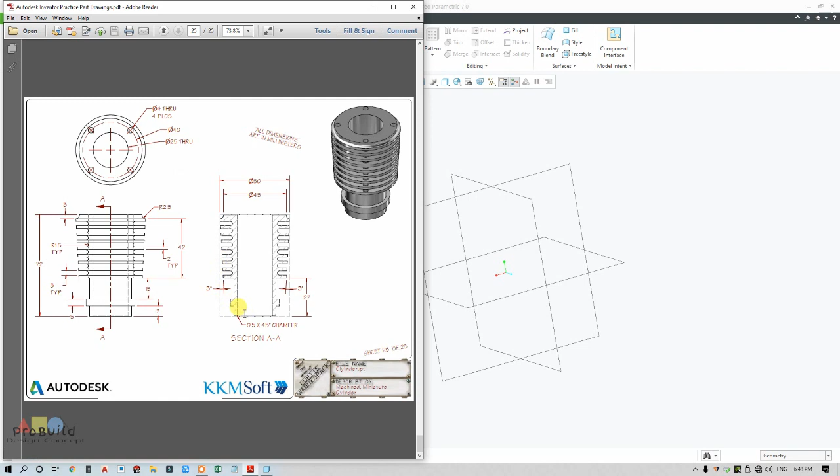So let's go into the model. I'm going to draw a circle, so let's go to the front or right plane. I'm going for revolve operation with a 2D sketch, and once opening revolve, don't forget to put a 3D center line, which is very important, else it will not work.

First I'm going to mark only one single dimension, so that it assumes the remaining dimensions I'm going to construct will be smaller. My first circle dimension is going to be 25 through. This is actually given here as 40 - sorry, this is not 40, actually 25. My first dimension is 25, so here I'm going to put 25.

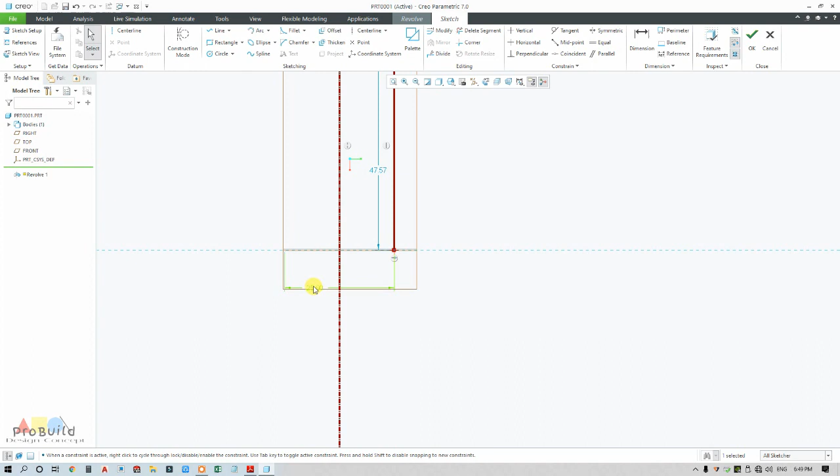Switch off the plane, and my height is going to be 72.

Here you can find there are many steps, but I'm not going to construct it that way. I'm going to go with a different kind of operation which makes my 3D model much easier to construct. I want to draw this outer sketch alone, so my extreme circle diameter is 50, and somewhat it is decreased to 45.

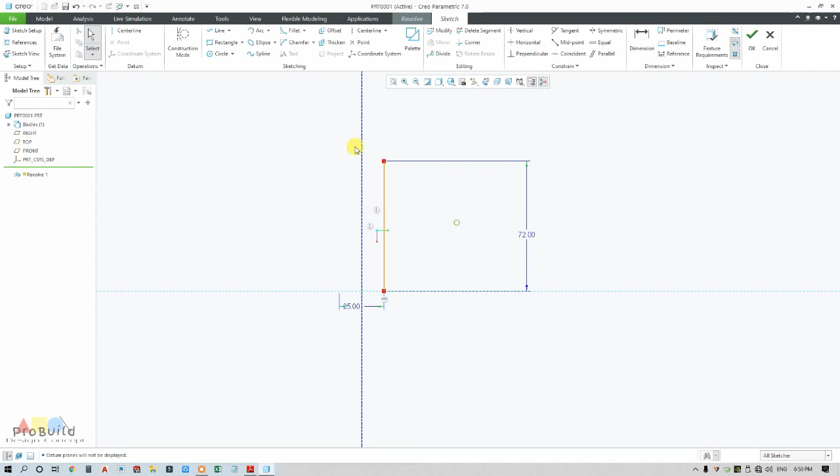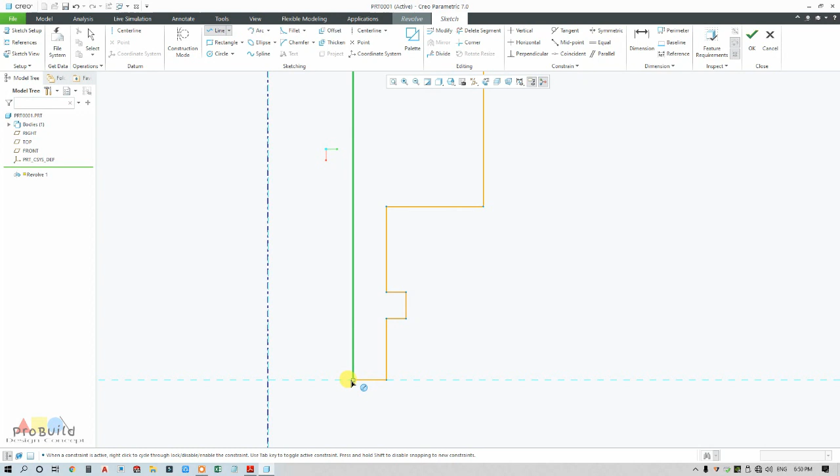Let me draw one line constructing from here, going from this point, and it is going this way. So I constructed the skeleton. Now all temporary dimensions have appeared. Now I'm going to put the required dimensions, then constrain it everywhere.

So these are all the dimensions which are needed, and also this one. This is 45 as stated, and this one from here to here is going to be 50, which means 25, and overall length is actually 72. You can find that from this base it is 7, and this one is 5, and this one is 15 and 42.

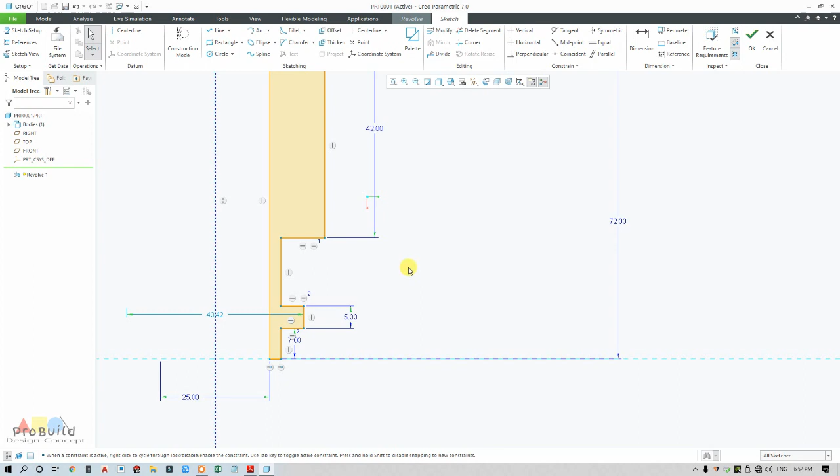Actually this one is 5, this one is 7, and this one is 42. So this one I did not constrain, because I constrained this as overall height, clearance is actually 72, so it will be that as this 25 radius and this is 25 diameter.

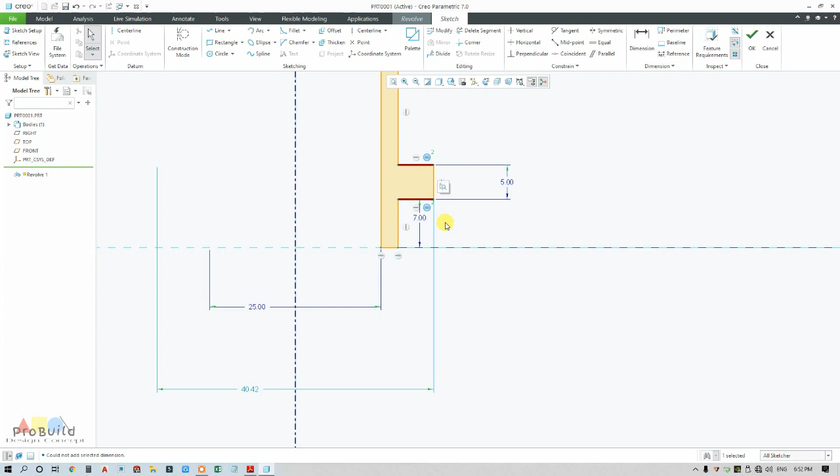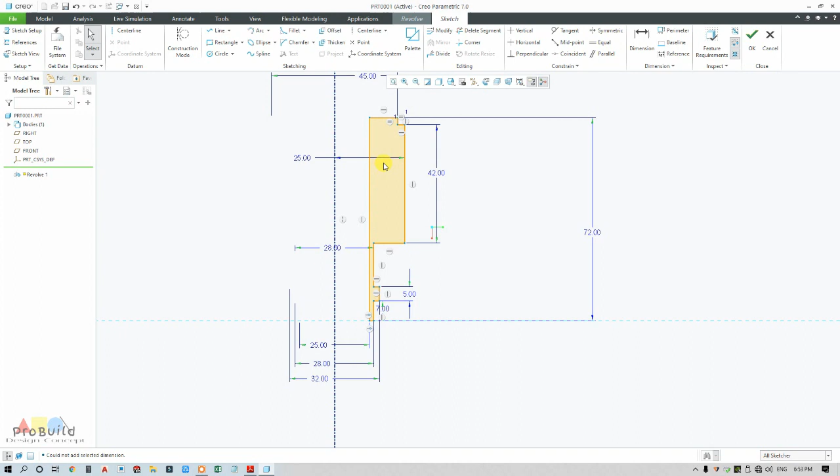Now this value isn't given, and this thickness is not given, so I'm going to convert this to radius. Let me make it not equal so it comes here. I'm going to presume here as 38, 28. And even this is not equal to - this is also 28, and overall I'm going to convert into 32, and this one is 50. No problem, I'm done with the object.

So this is what it is given, so let me convert this to 30 so it looks thicker, and this to 34, then click OK to form the basic 3D model. So my 3D model is obtained.

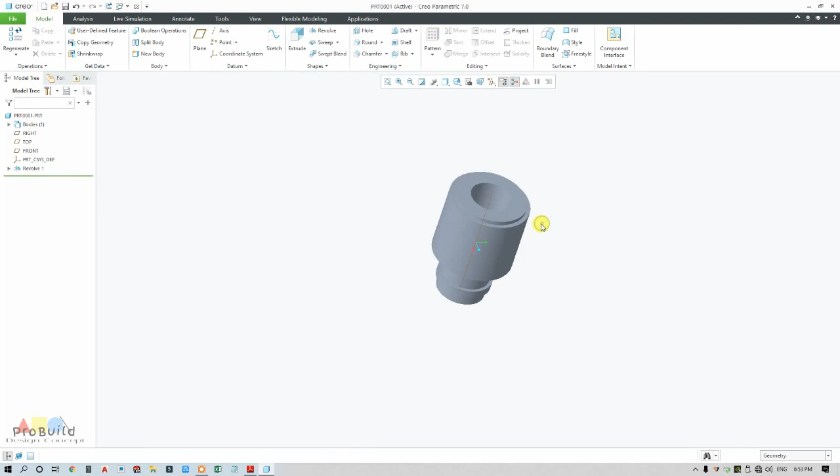Now what I'm going to do is one small operation here - they have given a 0.5 into 45 degree chamfer. Let me go to this chamfer, click this edge, and change here as 0.5. So this is done. Now I need to create a profile.

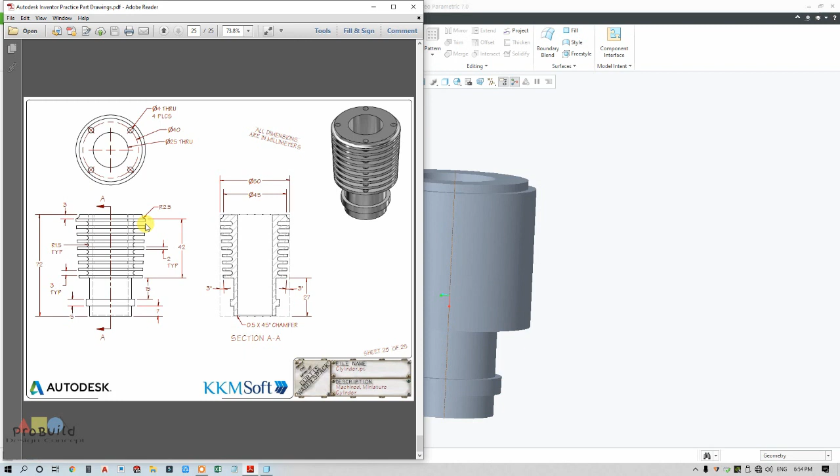So here they have given fins - actually 1, 2, 3, 4, 5, 6, 7, 8 and 9 fins are given. So I'm going to calculate this 42 divided by 9, which means this fin thickness is actually 2. I'm going to calculate this removed material thickness alone, so that I can easily pattern it.

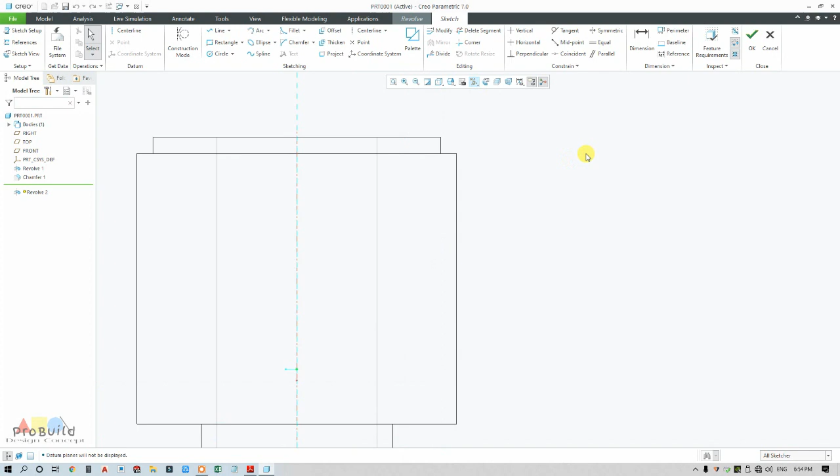So choose any one of the planes. I'm going to choose the top plane and go for revolve once again, and change this to hidden line. Switch off the plane. Now I'm going to draw - you can find here that the fin starts from this point. Actually I'm going to start this sketch alone.

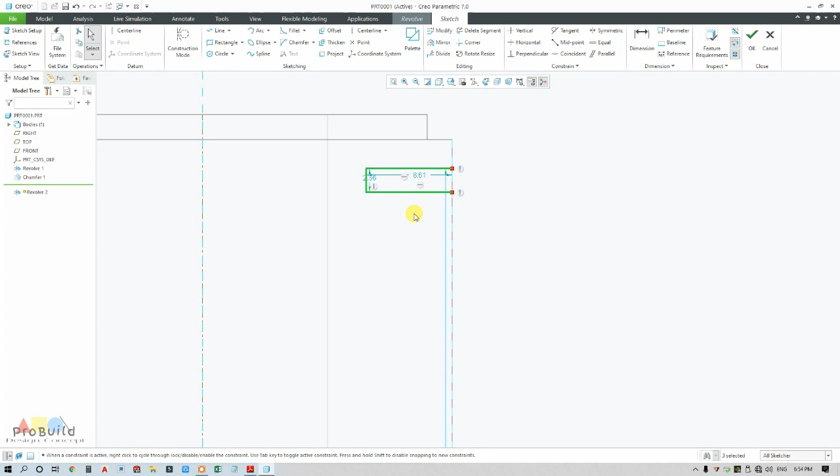So what I'm going to do is start here with my sketch, and put a geometry center line here - don't forget. This one I'm going to set as 30, and this one as - I need to calculate this actually.

The fin's thickness is 2, so overall this number of items is going to be 9, so 9 into 2 is 18. Let me calculate. Overall height is 42 minus 18, so 24. So 24 is going to be the cumulative 9 items thickness. So it's going to be divided by 9, which gives me 2.667. So I'm going to take it as 3.01.

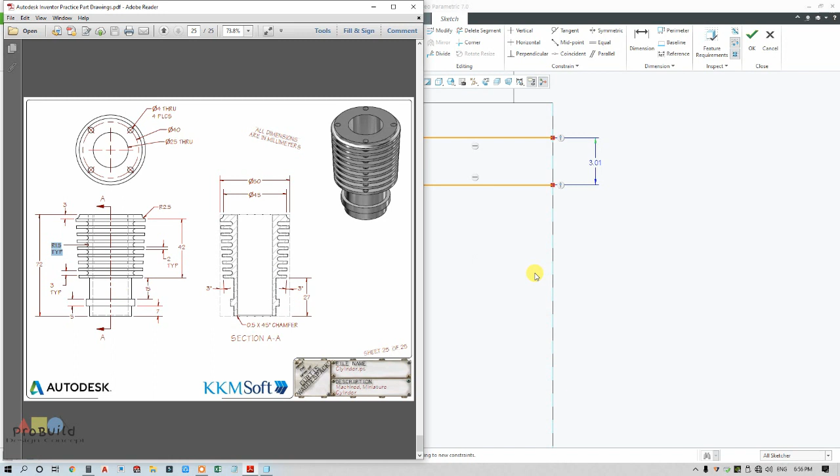I will say why I'm taking this 0.01. So there's one difference we can find. This one is actually 3.01. Okay, because the data given here is R 1.5. So here 1.5 plus here 1.5 is going to be 3 exactly, but the fillet needs some clearance to have one small line, so I'm giving 0.01 as basic tolerance.

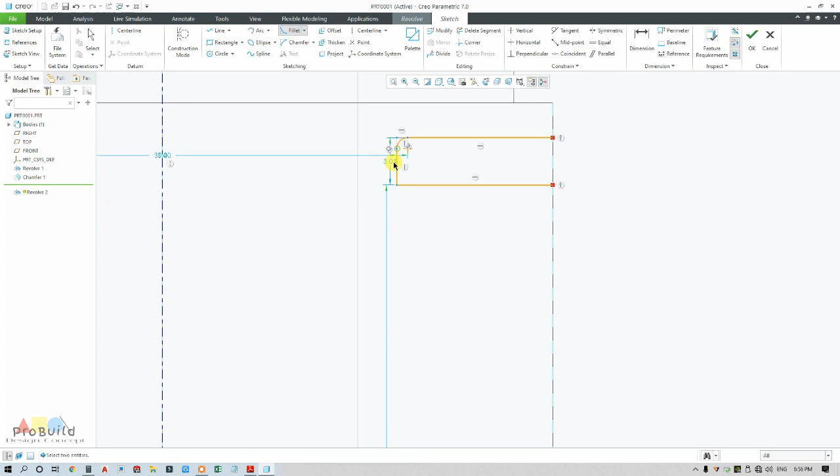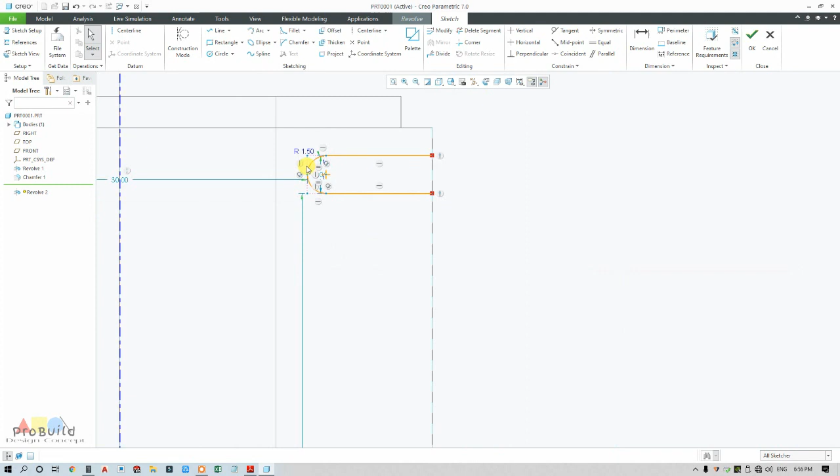So just go for fillet here itself, else it would be very tedious when you make round for 9 into 2. So go for equal, click this and this so that it becomes equal. I'm going to make one dimension change so that it gets reflected to the other side. So if I make 1.5, it gets reflected. Now close this profile and click OK. Now go for remove material and click OK.

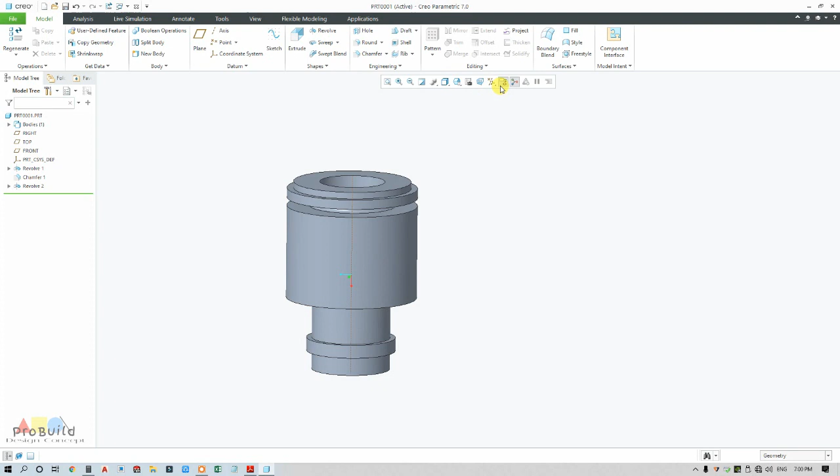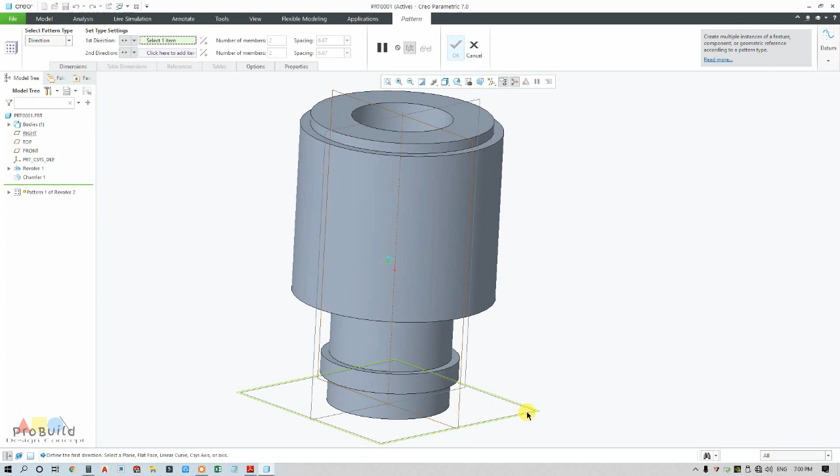So my material is removed now. Just click OK. Now switch on the plane, select this revolve operation and go for pattern. Now I'm going to teach you one pattern, so go for pattern, direction pattern, and you have to select any one direction. My pattern is going to come towards this vertical line from top to bottom, so I need to select this plane so that it comes bottom. See, it comes bottom here.

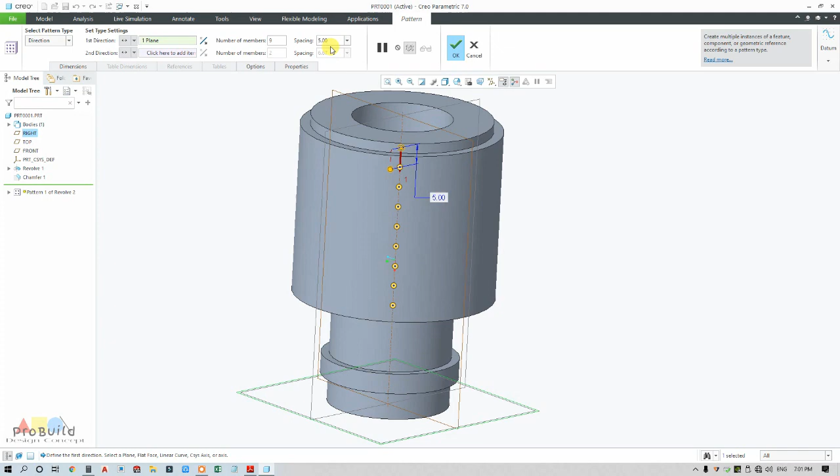My number of members is going to be 9, and internal spacing is going to be 5. You can assume that the thickness we drew, 3, plus 2, the fin thickness, is 5. So just click OK. Your fin will come here, and so it's all done.

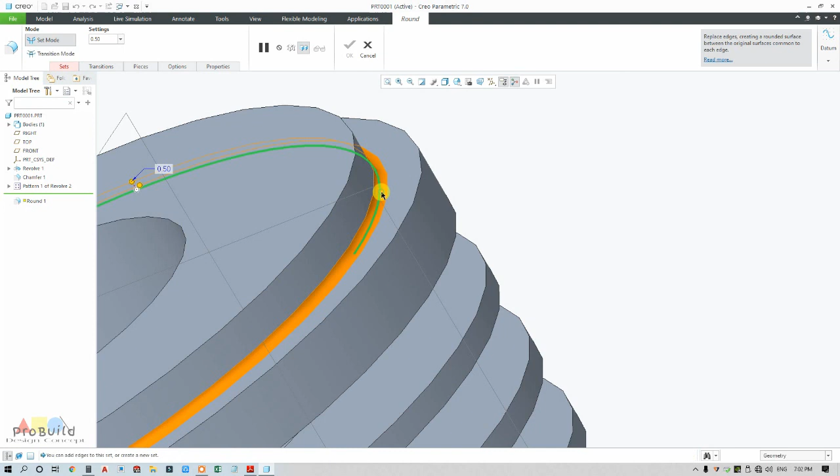Now I'm going to go with round. Here you can find that they have given R2.5. So just go to this edge, go to round, click this edge and change to 2.50, so it covers exactly. And now finally I need to go with this draft. I'm going to make a draft here of 3 degrees.

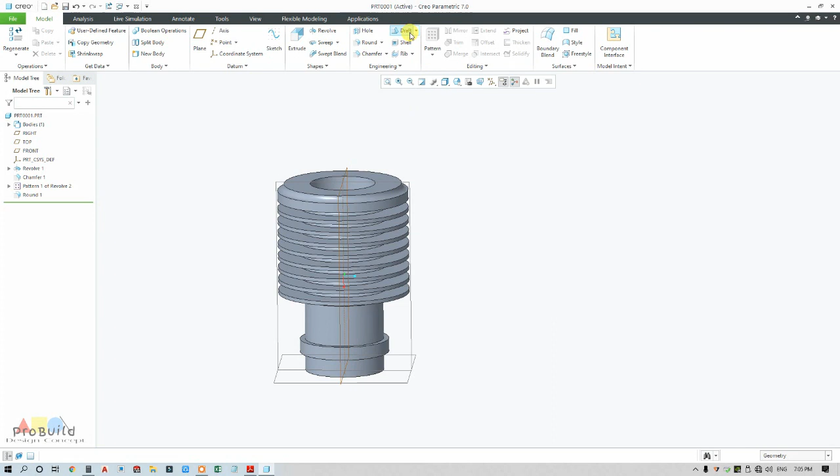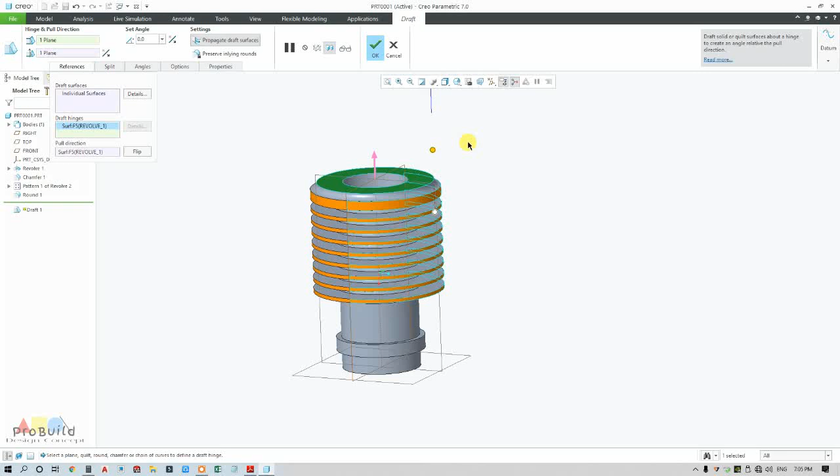So just go to draft, and here I'm going to keep this draft surface as the top surface, sorry, remove this. Draft surface is going to be this surface, and the draft hinge is going to be this top surface, so if you just click you can find this surface turns orange, right? And if you enter angle at 3 degrees it goes inside. So this is the draft angle, it decreases by 3 degrees, and my part is ready.

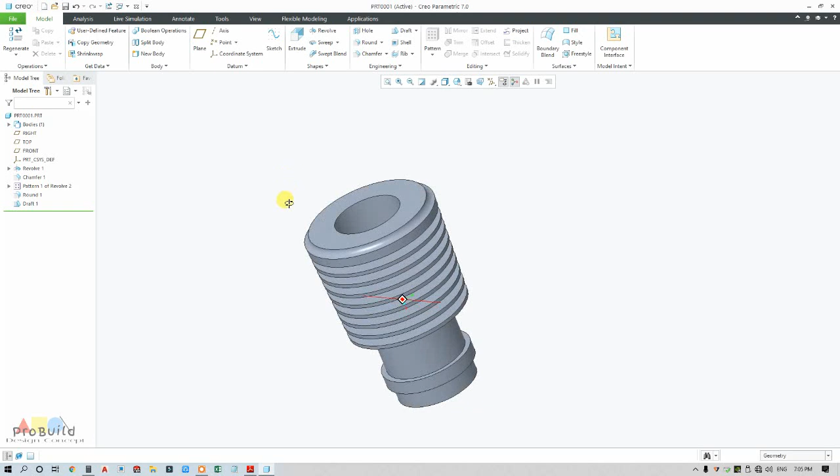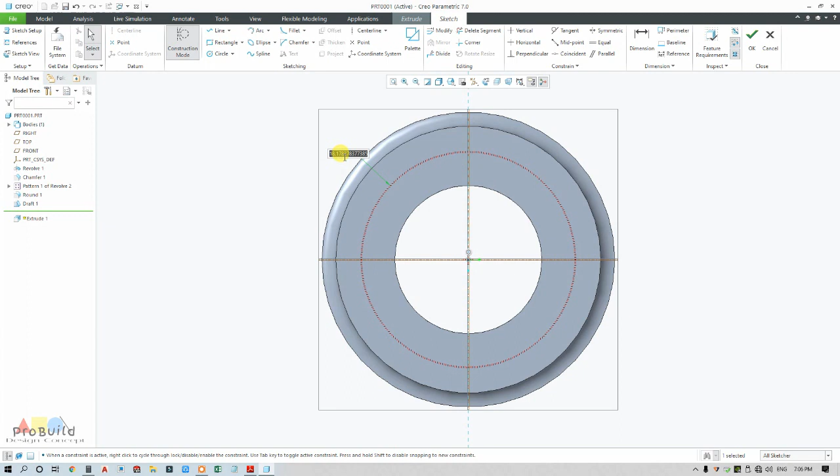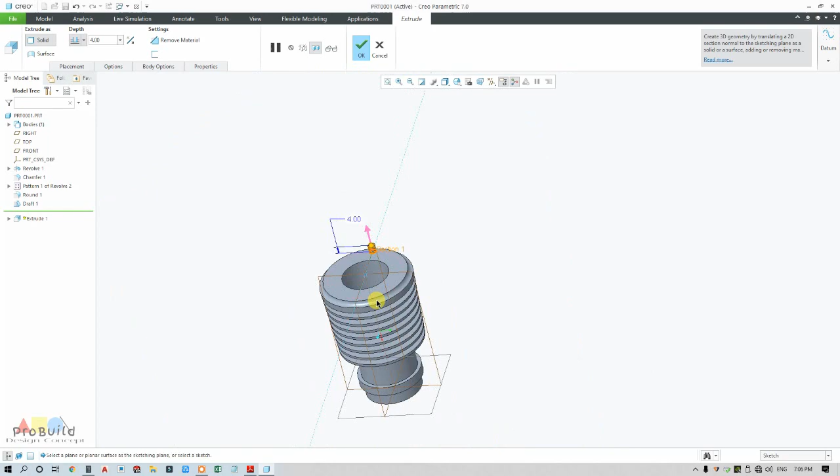So is there anything left? Yeah, this hole. Here they have given PCD as dia 40 and 4 places through. So just select the circle, go to extrude, go for construction line, draw a circle, change this to 20 since it is given as dia 40. Now switch off the construction mode, go for normal circle and change this to dia 4. Now click OK. It's going all the way down and it is removing the material also.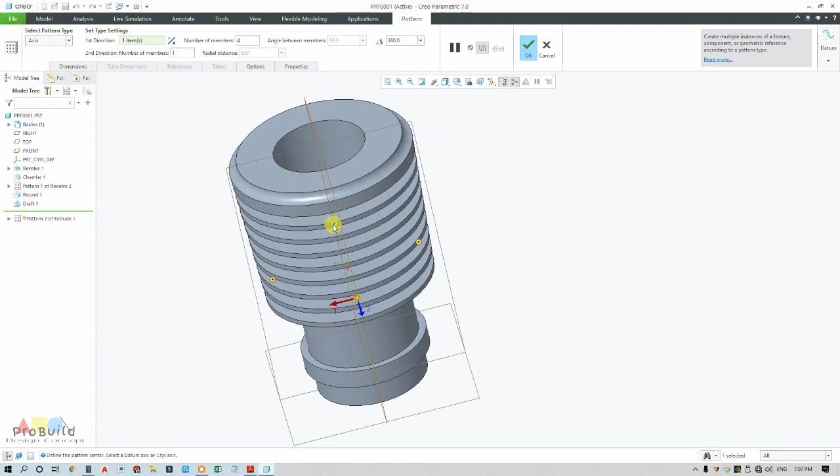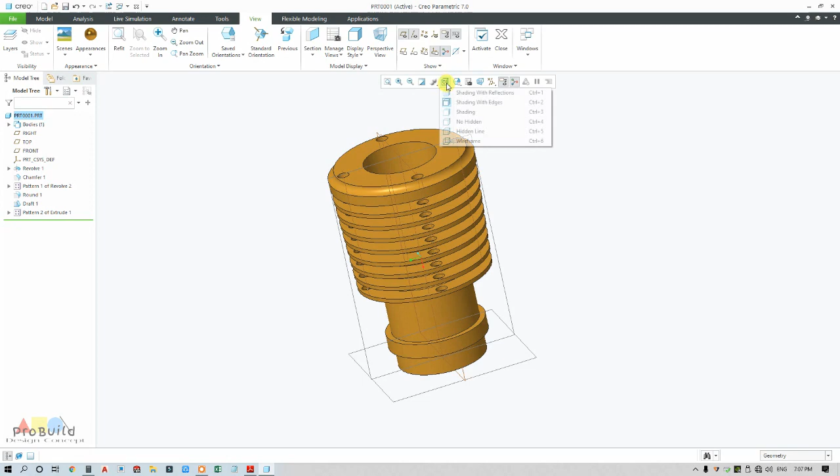Just click OK. Now select this operation, go to pattern, axis pattern, select this axis. My number of members is going to be 4, and click this 360 degree icon. You can see here this is a trial piece, and if you click OK, my holes will be created. So my part is ready. Now I'm going for view, and everything is right. Go to appearances, change this to golden color, part, click OK twice and change this to shading with reflection. So my part is ready.